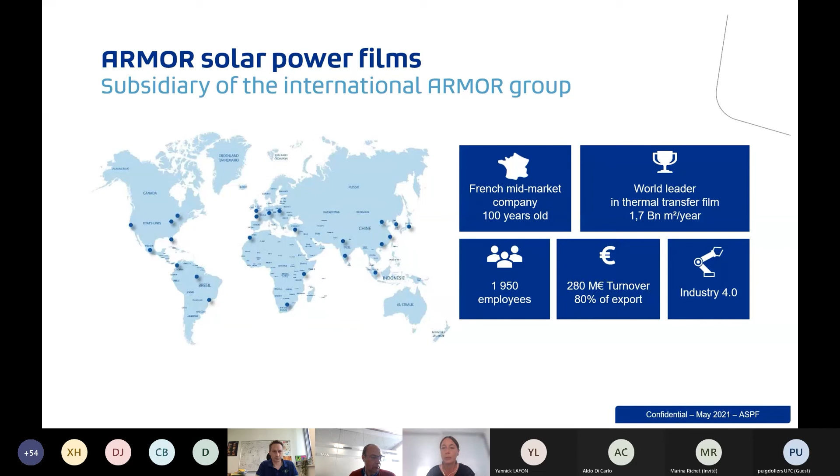So Armor Solar Power Film is a French company, which is a subsidiary from the International Armor Group. Armor is a French company with 2,000 employees worldwide, and it's a world leader in thermal transfer consumables. So it's wall-to-wall coated films to print barcodes, for example. So the main activity of Armor is the thermal transfer and the printing. We are involved in circular economy as well and in new technologies. And part of these new technologies is the development of organic photovoltaic via Armor Solar Power Films.

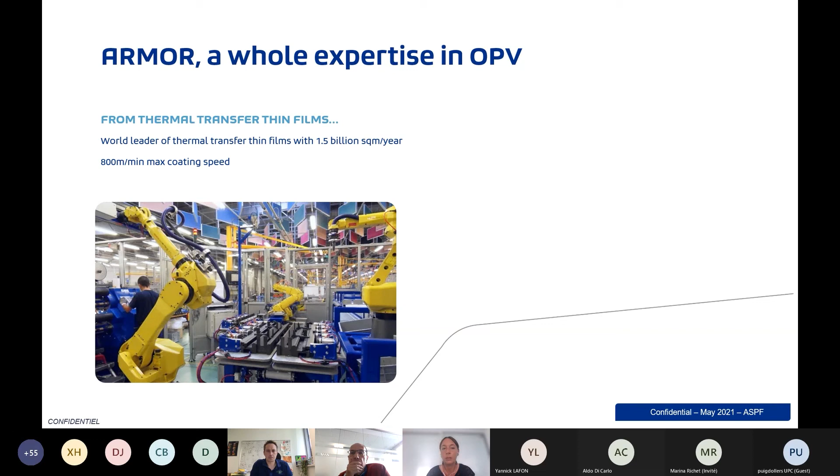So why OPV for such a company? For the thermal transfer film, we are coating wall-to-wall at really high speed, up to 800 meters per minute. And our expertise is in formulation and coating. So we keep this expertise in formulation and coating to develop some organic photovoltaic film in the same schema. Meaning that we already have installed in Nantes, in France, a large-scale production line for OPV that has a global capacity of 1 million square meters per year for OPV films.

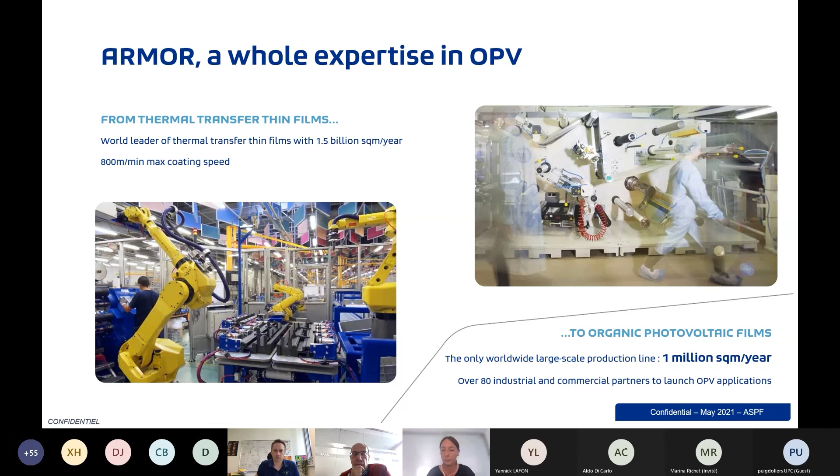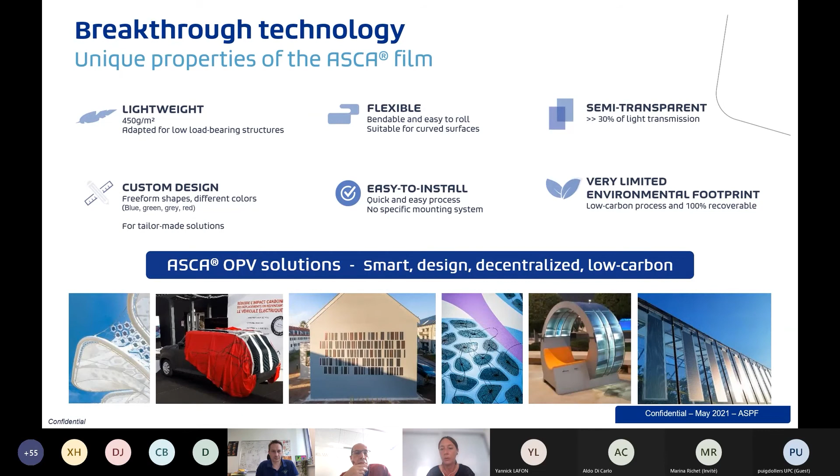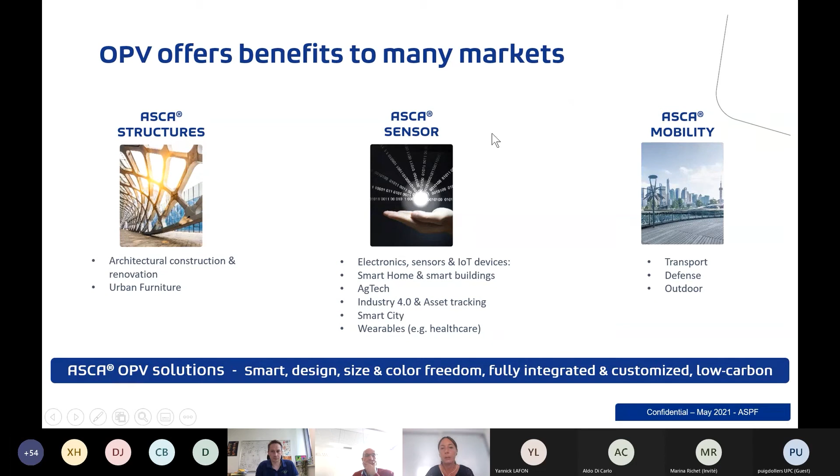So the properties of OPV, everyone knows, lightweight, flexible, and can be semi-transparent with a potential for higher than 30% of light transmission. And that's where the interest of OPV comes from for projects such as Tech4Win in windows. OPV is used in structures and buildings, but also can be used as a sensor and in urban furniture, for example. And here are just a few examples of first applications on buildings that we had with OPV.

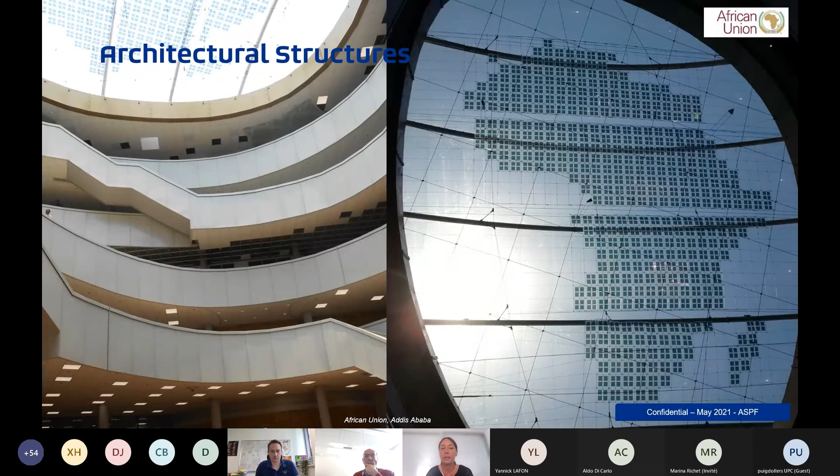But as you can see, we are using OPV as a design and architectural tool, but still at this point not really transparent. We can have some really aesthetic effects, but if we really want to go to window integration in buildings, we need to get rid of part of this design or to go to really transparent devices. So that's why the interest of Tech4Win is great for the market and mostly for the BIPV and window markets.

And when we go to this kind of product with transparency and windows, there are quite a lot of industrial challenges that are to be taken into account. So I will just go through some of them, not all of them, because we will find some during the project, I guess. So just as a basis, what do we do today as transparent OPV? So at this point, we already can do some semi-transparent OPV. It's quite a common thing on a semi-industrial scale. We can have some different colors, for example, blue, red, green, gray, but always we have color samples.

We have a transparency that is, for the AVT, between 20% and 30%, depending on the architecture and on the color of the devices. So it's quite nice looking, but still not transparent enough to be integrated in a window. And quite an important thing is that we have a pattern of electrodes and interconnect design. So we can clearly see on the pictures that we have some blank lines and we have some patterns, meaning that the area of the device is not fully homogeneous, and there is some aesthetic loss in this kind of devices. So there are different challenges to overcome.

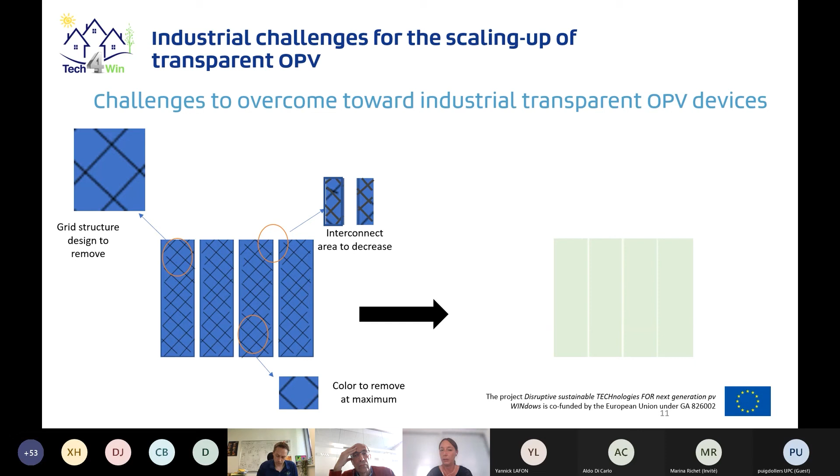Some are more materials based, so based on the layers and materials that are used in the stack, and the other ones are more process related. But as I began to explain, the main challenges are, if we go from a usual industrial device on the left, first one is really to remove the grid structure design that we usually are using in OPV today. Second one is to remove the color as much as possible and to really work and optimize the CRI. And the third one, not the easiest one, is to decrease the area of the interconnect from one cell to the other. And at the end, the idea is to reach a close to colorless device with nearly not visible interconnect and no pattern for the electrodes.

If we go to the materials challenges for the transparency, one of them is the use of the transparent conductive electrode. Today, we are mostly using on the industrial scale a stack of ITO, silver, ITO, so IMI, which absorbs in the near-infrared region above 800 nanometers. There is a slight absorption. So when we use transparent OPV materials, polymers, we lose some of their absorption in this area due to the transparent bottom electrode. So this impacts the JSC and the power conversion efficiency, and the impact can be between 5 and 10%.

Regarding the top electrode, so that's what I just presented previously. No design is needed, so we need to develop new electrode concepts. So we heard a lot about ITO, sputtered or with pulsed laser deposition, in the previous talks. Another solution can be to use transparent nanowires or other concepts that have to be developed and transferred to the industrial scale.

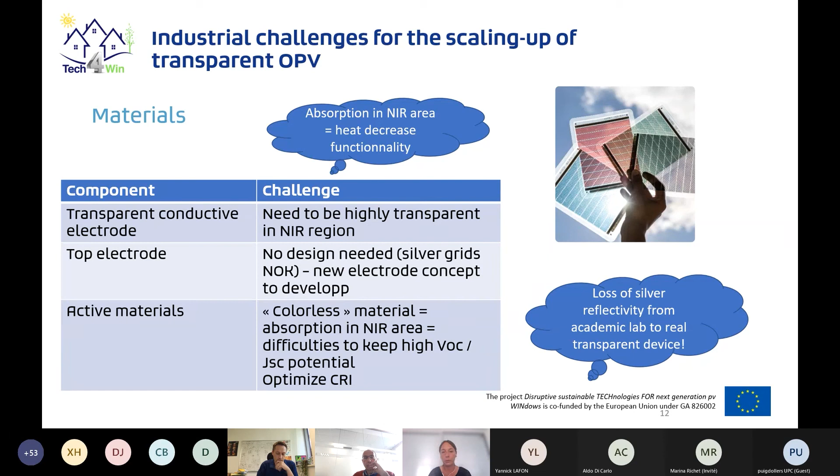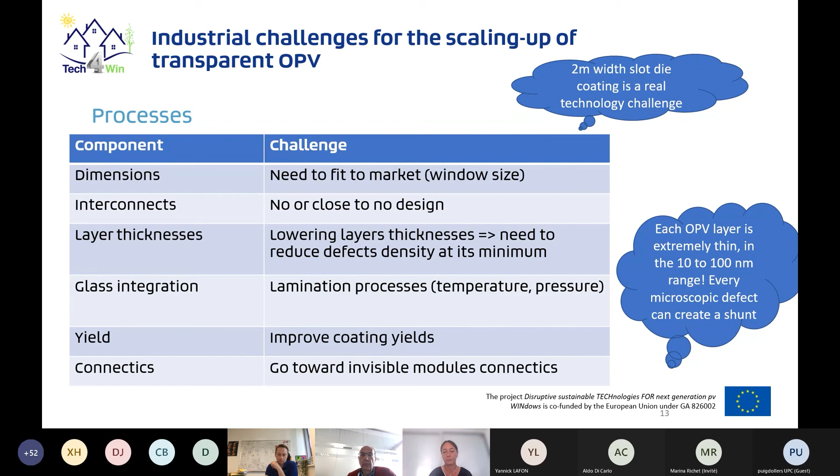And the last point is linked to the connectics, the last point in the list here, but I'm sure there are other ones. But the connectics is also a challenge that has to be taken into account at the beginning of the project, because we will need to go towards invisible or really hidden module connectics. So it's really a big challenge and a really interesting and enthusiastic development for industrial partners as well.

And to answer a few of these challenges, the Tech4Win strategy is really to target high transparency, optimized CRI materials for each layer. The strategy is also to ensure lifetime with the integration of the UV device. Lifetime for OPV is good these days, but if we need to really target the lifetime of a window without any failure, it's good to really assess this lifetime strategy really early in the project.

Then the near-infrared absorption and the loss of reflection due to the transparent top electrode will be assessed with the use and the integration of a Bragg reflector in the devices, allowing us to really increase the performances of the final devices. And we integrated in the project the design of dedicated industrial equipment that will allow us to really produce on demand the final product at the real size that is needed for the final applications.

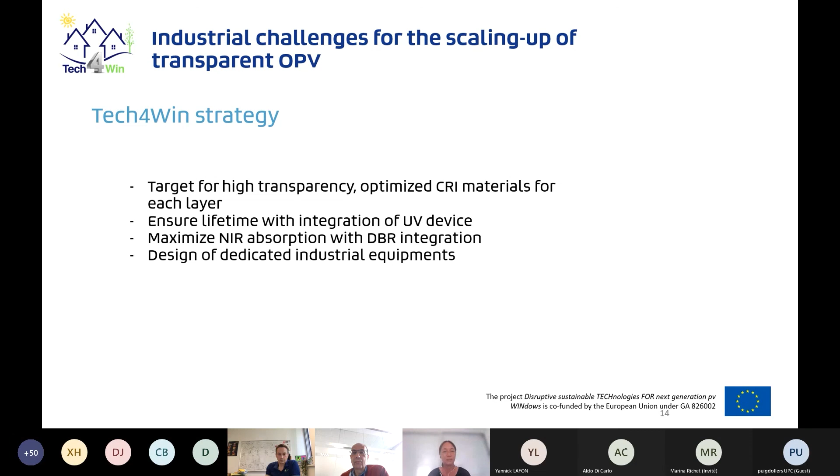So that's just a few of the strategy paths that need to be assessed in the project and for the scale-up. But maybe in a webinar later on during the project, we can talk about some other ones. And that's all from me today.